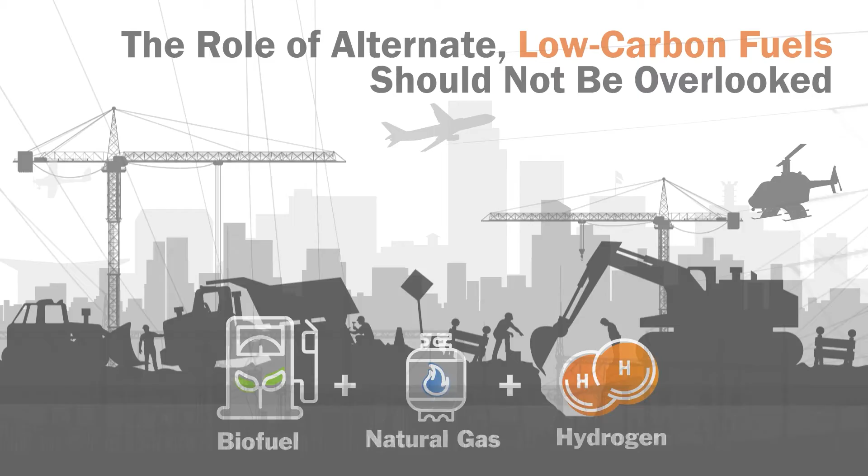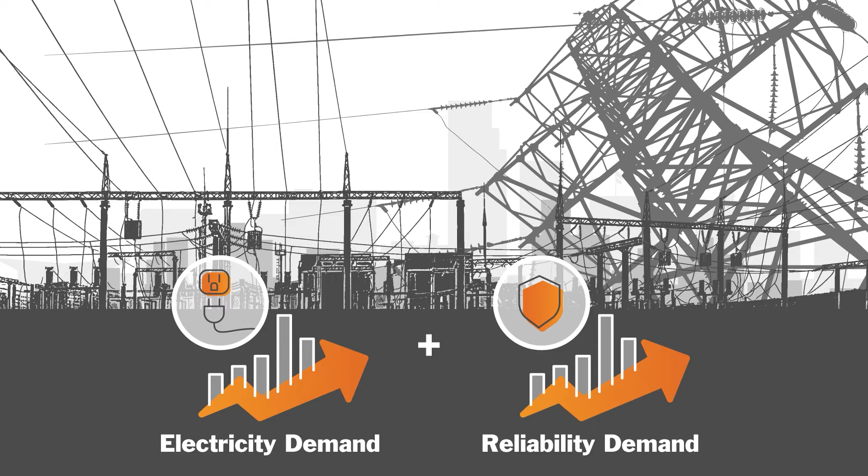We must consider the community-wide impact of decarbonization on the electric system as a whole. We know that electricity demand will literally drive when and how electricity is used. As demand increases, so does the imperative for reliability. As other sectors of our economy also work towards decarbonization, and as the population and economy continue to grow, OPPD is forecasting energy demand and growth that exceeds demand 150% by 2050.

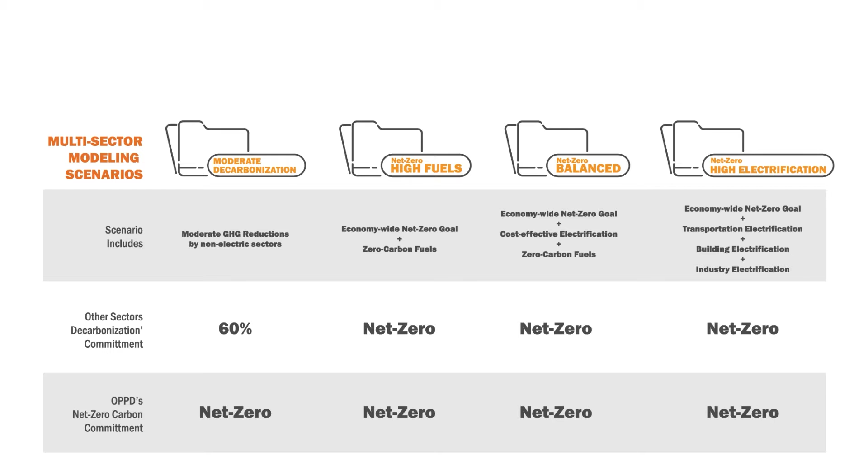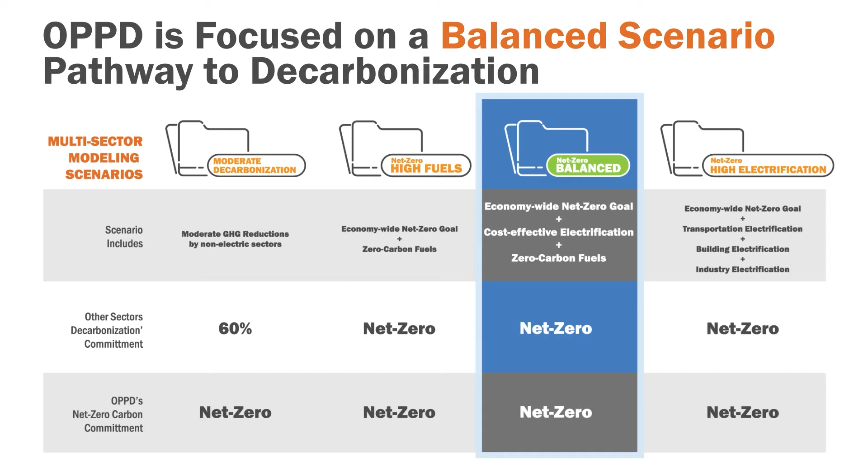To do our part to support all sectors, we're focused on a balanced scenario with multiple ways to get to decarbonization. The scenario that relies on a combination of electrification and decarbonized fuels is also the most cost-effective. The balanced scenario assumes that in the future, there will be a significant increase in electric vehicle adoption, that building heat will primarily be provided by electric heat pumps with natural gas backup, that industry will transition to a combination of electricity, hydrogen, and carbon capture and storage, and about 15% of the remaining total economy-wide emissions will be offset by negative emission technologies that actually remove carbon dioxide from the atmosphere.

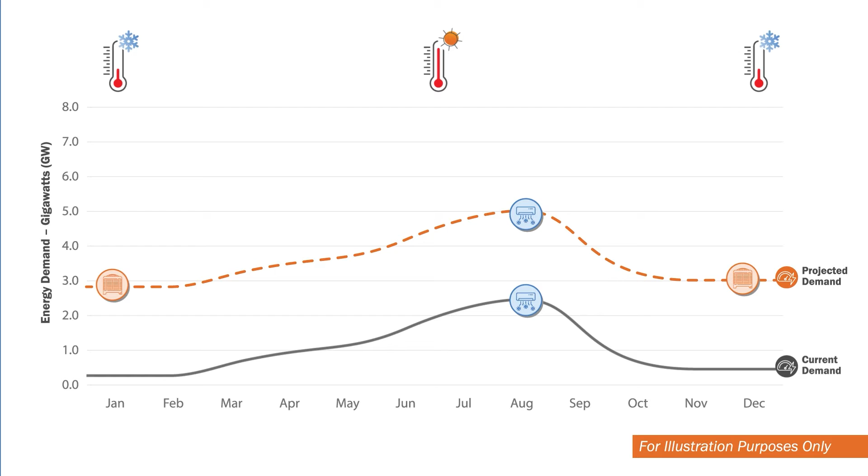When we put these assumptions into the balanced scenario model, we see a shift in the peak demand for electricity. Today, peak demand occurs on hot summer days when high temperatures mean more demand for air conditioning. In the future, cold winter days may also increase demand as building heat transitions to electric heat pumps. While we expect winter demand is still less than during summer, this shift results in peak electricity demand that more than doubles what it is today, from 2.5 gigawatts to 5 gigawatts.

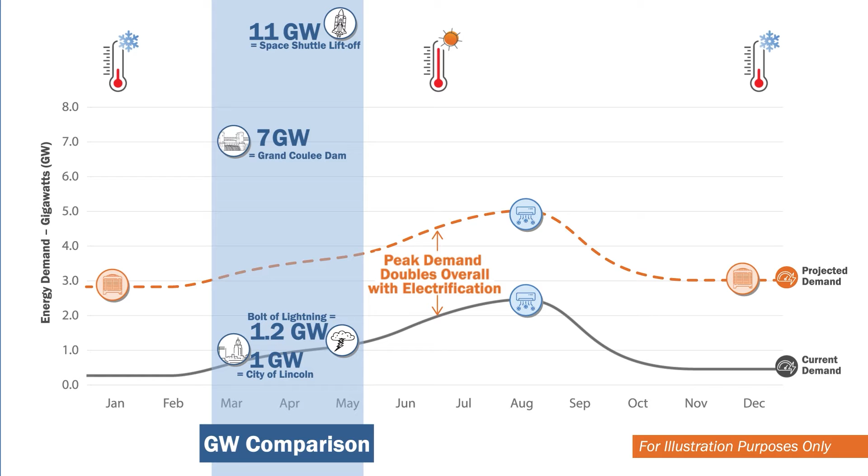Serving this sizable increase in electricity demand while working towards a decarbonized future makes OPPD's commitment to reliable, resilient, and affordable power more important than ever. At our third workshop, we reviewed the technologies we're considering, their performance, and associated costs, as well as fuel forecasting and modeling scenarios. As we consider and anticipate other sectors also making efforts to decarbonize, we assume and include energy

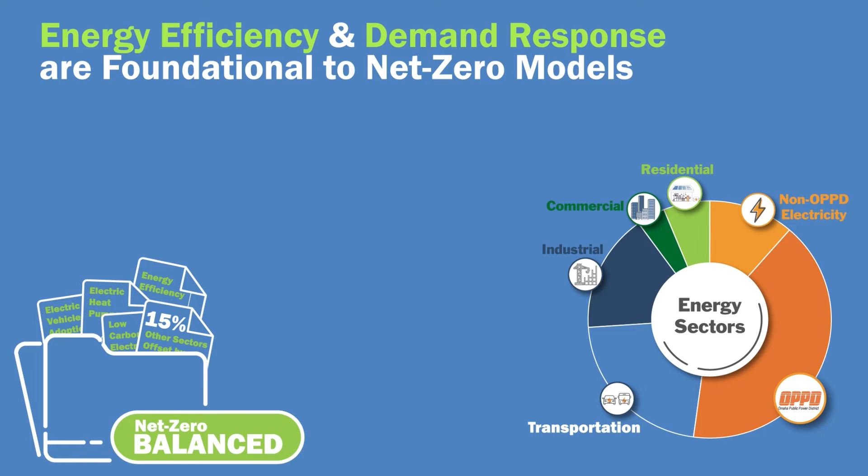efficiency into our modeling. And while widespread electrification will increase electric demand, there is an upside. Appliances and electric vehicles will require less energy to operate. So, even as electrification increases, energy use remains relatively unchanged or even slightly reduced due to increased efficiencies.

Consider your personal vehicle. As more people buy electric cars, that reduces the reliance on fossil fuels and reduces emissions. While electric vehicles add to the demand for electricity and require infrastructure updates, they are much more efficient in reducing emissions, like 3 to 4 times more than conventional gas-powered cars. So the net outcome is realized as energy that is never used or considered to be low carbon.

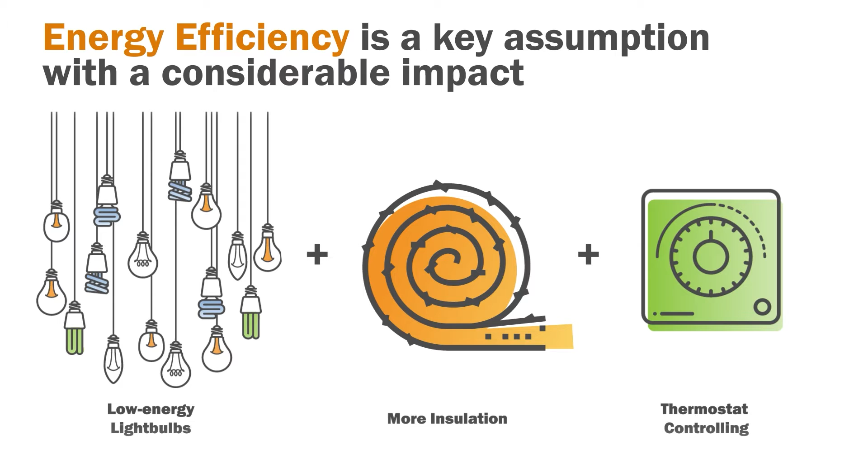Efficiencies can also be gained through programs that promote low-energy light bulbs, more insulation, or thermostat controls. This phenomenon multiplied for widespread use contributes to community-wide decarbonization, making energy efficiency a key assumption with considerable impact. To support the increased transition to more energy efficiency and the demand growth for electrification, OPPD identified, studied, and considered over 150 existing and future or emerging energy production technologies for its energy portfolio.

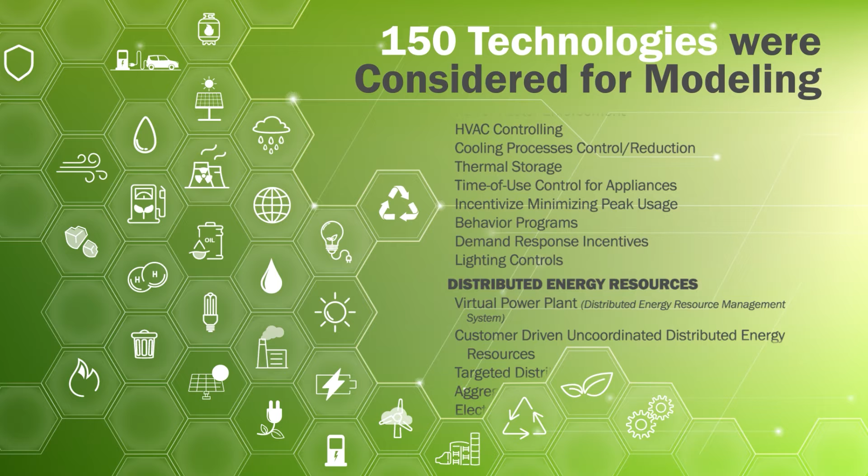This research included options for OPPD's existing power generation assets, as well as those that are planned or coming online through Power with Purpose initiatives. Considerations included leaving existing assets in place or converting existing assets to utilize other fuel sources, like coal to natural gas, oil to biofuels, or natural gas to hydrogen, and finally, the possibility of someday retiring some power generation assets.

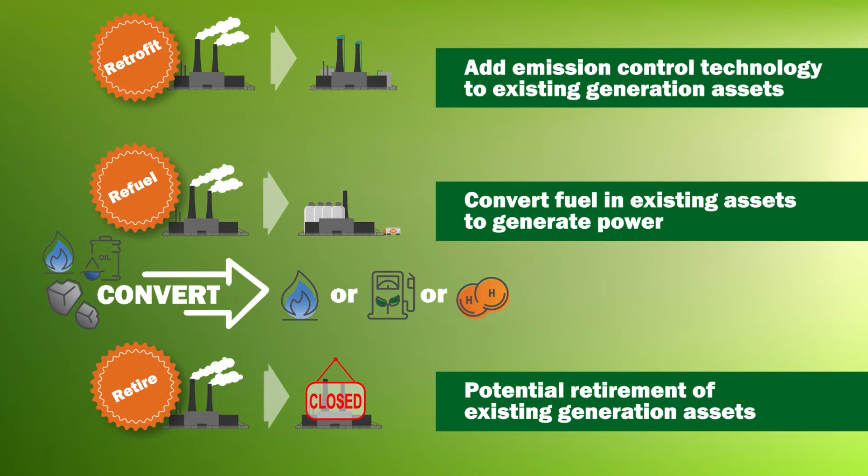Our existing and planned assets are integral elements of our energy portfolio as we transition to net zero carbon production by 2050. OPPD has determined carbon capture and sequestration will not be considered for coal-fueled power generation assets due to its significantly high cost, increased volumes of CO2 needed to sequester, and the lack of feasible physical geological formations necessary for sequestration in our service territory. We will, however, continue to consider carbon capture and sequestration for natural gas-fueled power generation assets since capture volumes are much lower for gas and the technologies are more manageable.

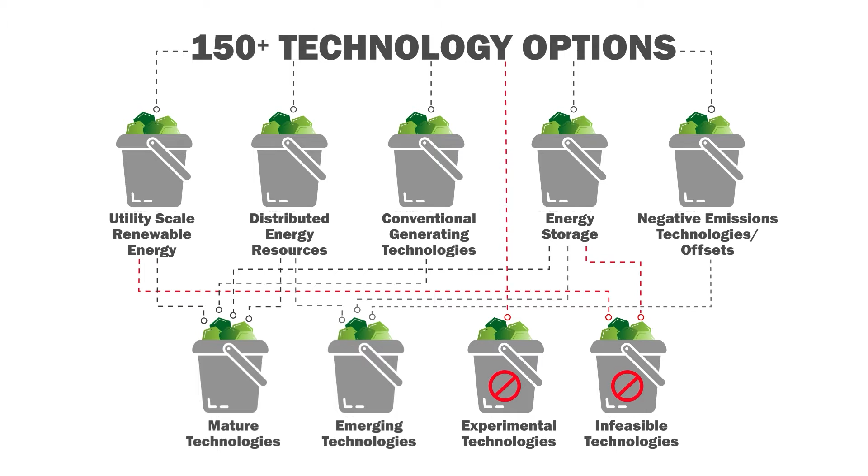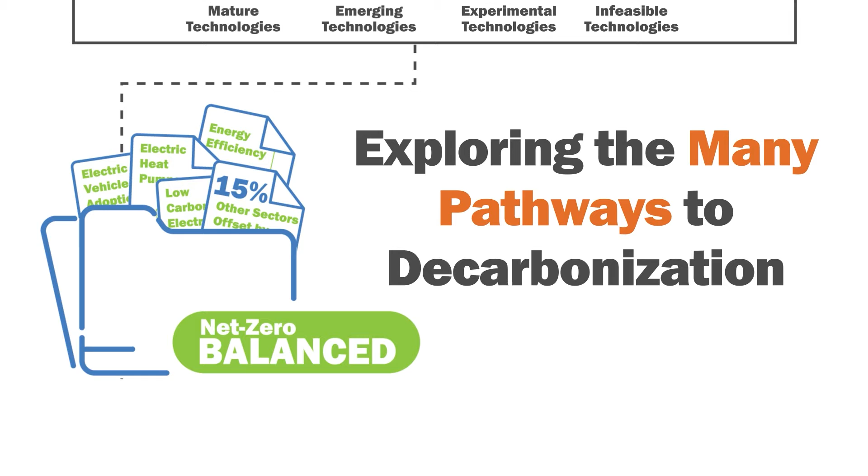Other potential energy production technologies we sorted and grouped. If a technology wasn't feasible, like carbon capture and sequestration of coal, it was withdrawn from consideration. Experimental technologies were also withdrawn. More suitable technologies were categorized based on cost, feasibility, and level of decarbonization. Technologies were then assigned a level of maturity or performance history ranging from mature to emerging or experimental. Each technology category, or combinations of technology categories, were explored further by modeling scenarios to support decarbonization. These assumptions and technology categories provided the basis to begin modeling.

In our fourth workshop, we focused on the technical aspects of scenario modeling and how it all fits together to map our pathways to decarbonization. The question we're working to solve is not if OPPD will pursue net zero carbon production, but rather how we can define an energy portfolio that is environmentally sensitive, reliable, and affordable for our customers. The future is uncertain, and we may not have all the answers today.

So our energy portfolio must be flexible and able to adapt to an ever-changing energy industry, customer preferences, and power generation technologies. Each scenario is analyzed for how quickly it will help OPPD reach the net zero goal, therein satisfying the need for environmental sensitivity. Next, each scenario is analyzed for reliability and resiliency. That measures OPPD's ability to keep the lights on and keep them on during expected and unexpected extreme conditions, like severe weather or energy grid disruptions. For this analysis, we must determine resource adequacy.

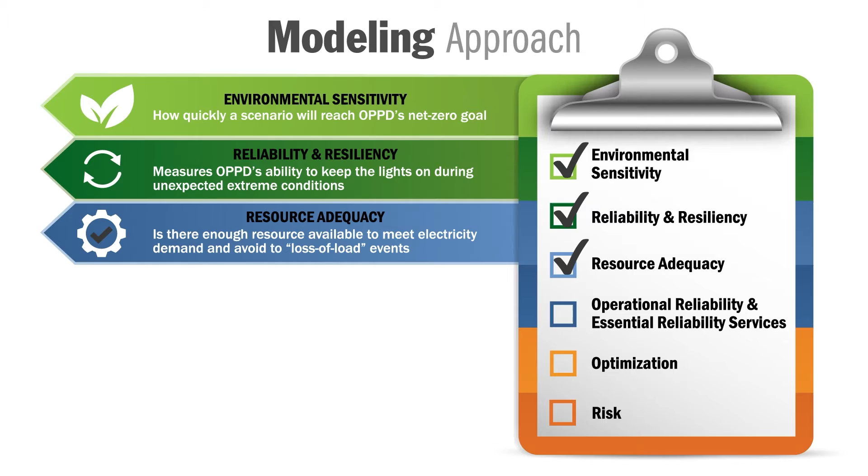That is, if there's enough of a resource available to meet electricity demand in a given scenario. Insufficient resources can cause unexpected brownouts or blackouts. We call this a loss of load event, and it occurs when the total electricity demand is higher than the available resources capacity. When the energy grid cannot support demand, it can result in brownout or blackout conditions across the system. By ensuring resource adequacy, loss of load events are less likely, if ever, to occur. The goal is to keep potential planned and unplanned outages to a minimum.

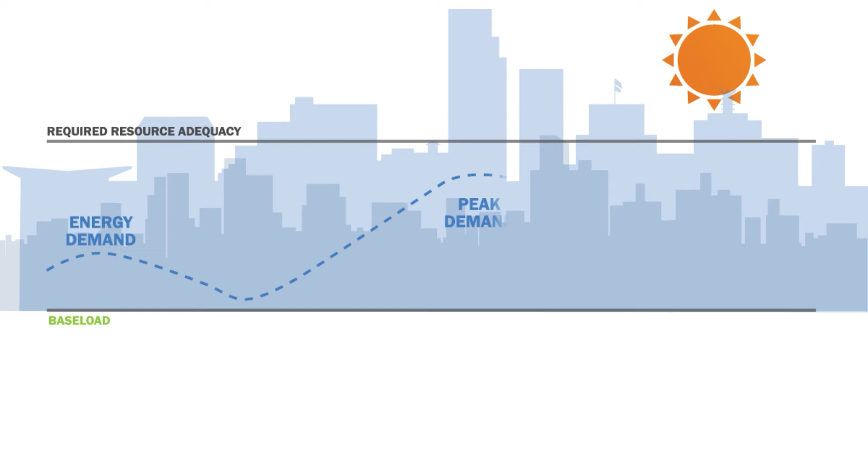To meet resource adequacy, we have to plan for peak demand and a bit more for buffer or a reserve margin. Traditional resources like coal, nuclear, and natural gas are better at accommodating resource adequacy because they can generate power at any time of day, during any season, for as long as needed. Planning for demand and reserve margins with these resources is straightforward. However, when we think about planning for demand and reserve margins for zero carbon resources like wind, solar, and energy storage, it gets more complicated.

Think about your energy use after kids come home from school and you get home from work. While the sun begins to set, you still need electricity to cook dinner, watch TV, power lights and computers for homework, or heat water at bath time. You'll likely also need to plug in your electric vehicle. It gets trickier to plan solar resources to fully meet peak demands. The same is true for wind and energy storage.

That's why we have to plan for a mix of power generation resources and supportive infrastructure to meet resource adequacy. Renewable resources have better potential to meet peak demands when combined together, like wind plus solar, or solar plus storage, rather than just wind, just solar, or storage alone.

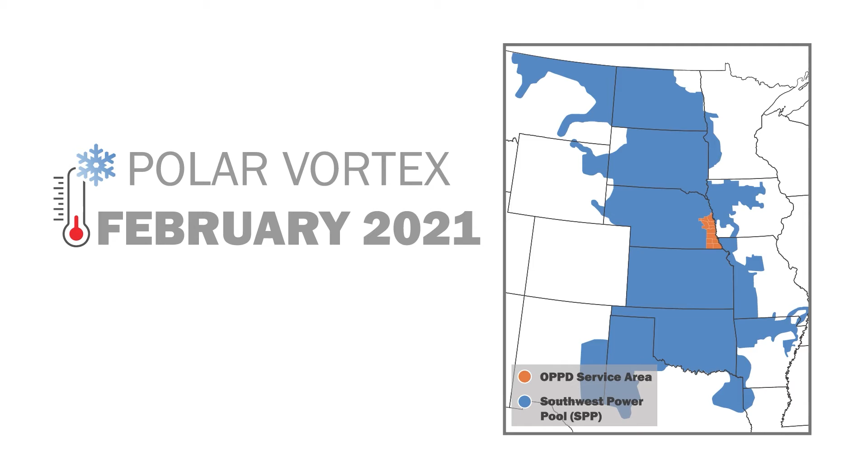To illustrate this, let's take a hypothetical look at the polar vortex outages that occurred across the Midwest from February 3rd through the 15th of 2021. If we look at the actual electricity demand for those bitterly cold days, paired with scaled actual solar and wind production available during the same time frame, which is significantly more than is currently installed on the electric system, we can easily analyze for resource adequacy during an unexpected, extreme weather event.

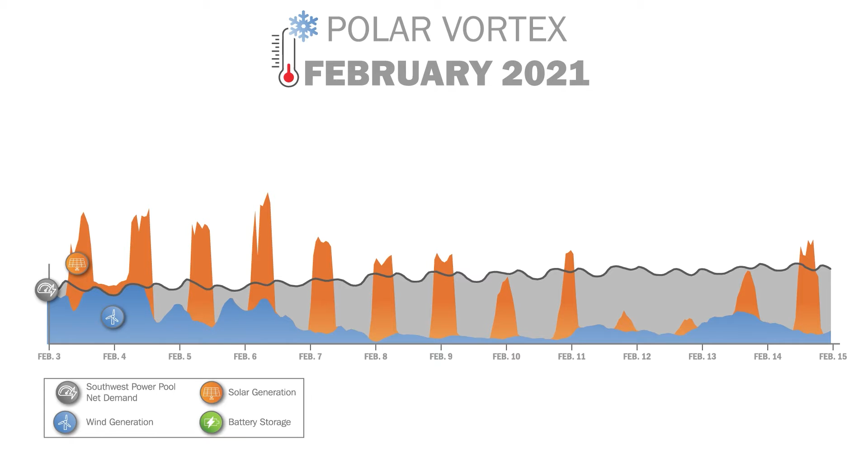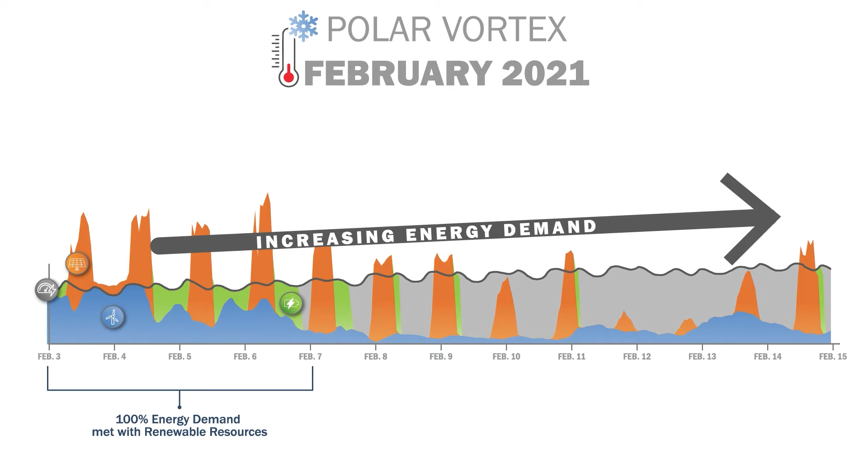For the first 4 days, nearly 100% of electricity demand could have been met through a combination of wind, solar, and energy storage resources. However, as the event continued, we see that energy demand steadily increased, despite pleas from the utilities for customers to curb energy use and alleviate excessive demand. It was so cold outside, electricity was needed to heat homes and buildings for people, pets, and livestock to stay warm, and to avoid freezing, bursting water pipes. In this real-world event, electricity demand increased while production from renewables decreased, creating a gap.

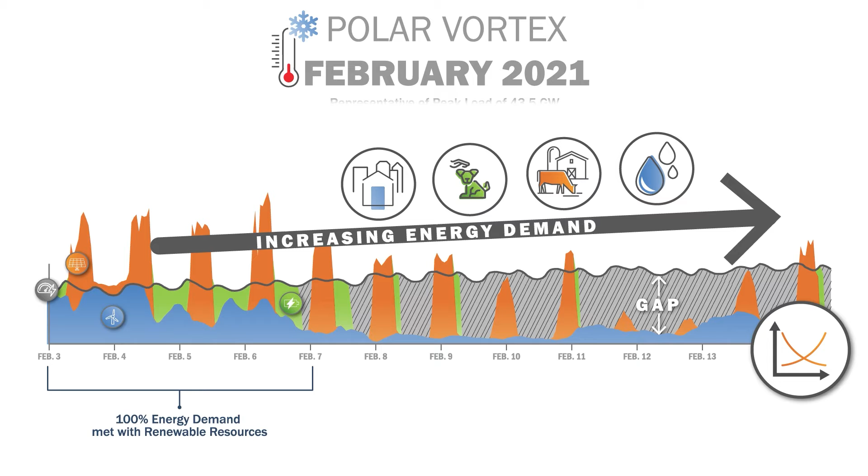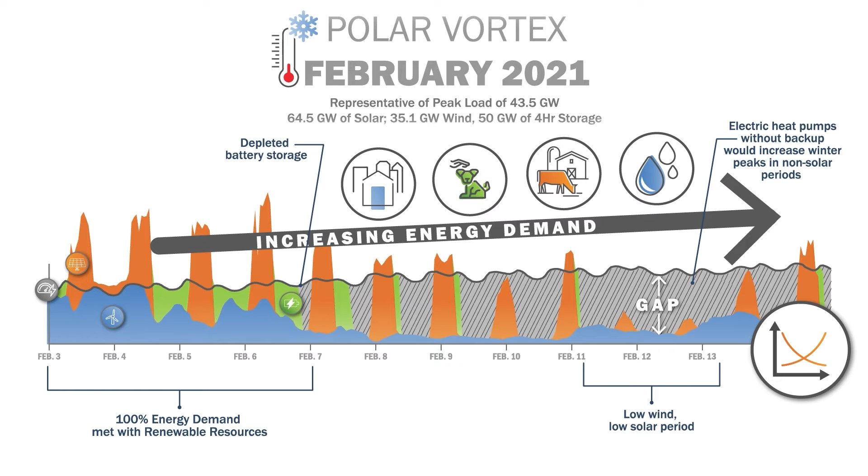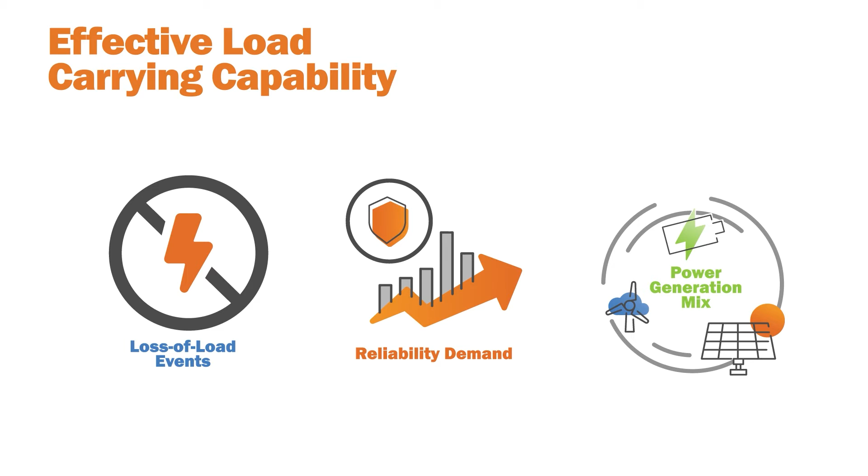The lesson here is that no generation resource, traditional or renewable, is perfect, especially when Mother Nature throws a curveball. It also illustrates the importance of resource adequacy analysis as we model OPPD's potential power generation scenarios for the future. We must find a mix of power generation sources that is reliable and resilient through an event like the February 2021 polar vortex. To do that, we look at effective load carrying capability of different resources. This measures loss of load probabilities and accounts for diminishing reliability contributions of resources, but it also captures the benefit of mixing generation resources.

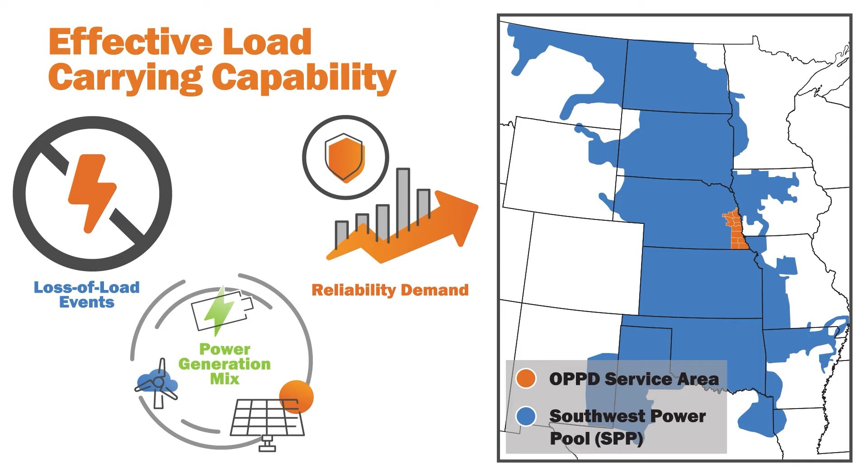OPPD's service territory is located within the Southwest Power Pool, or SPP. SPP determines the effective load carrying capability standards to measure renewable resources, which is key to our evaluation and demand responsiveness. Another aspect we consider is operational reliability and essential reliability services, meaning, are available resources capable of keeping the lights on? Are they able to ramp up or down to meet demand? Also, we need to consider the transmission system that distributes electricity while meeting both regional and national requirements.

We also look at resiliency to ensure our system is prepared and can withstand, as well as recover from, high-impact events like tornadoes, a polar vortex, possible fuel supply chain interruptions, or even a national security attack on our electrical grid. While there is not a specific standard or measure for resiliency, we can learn from past events and assess how a proposed set of power generation resources would perform. We then look for ways to improve resiliency during those high-impact events. That could include both infrastructure improvements and resource modifications.

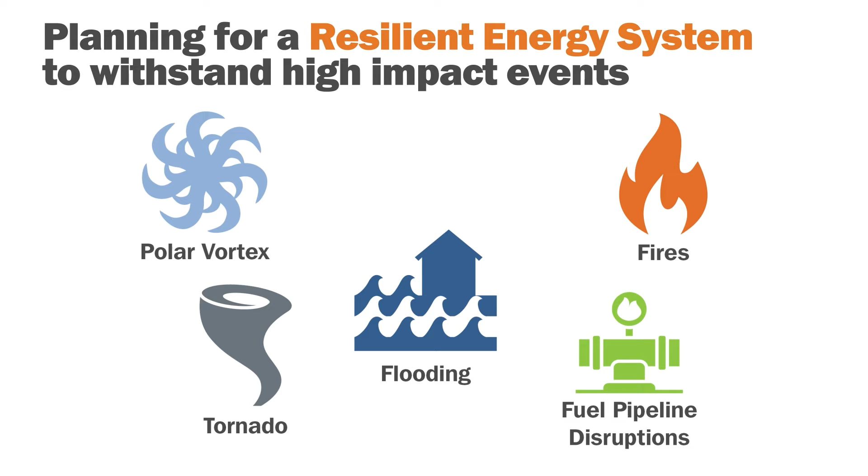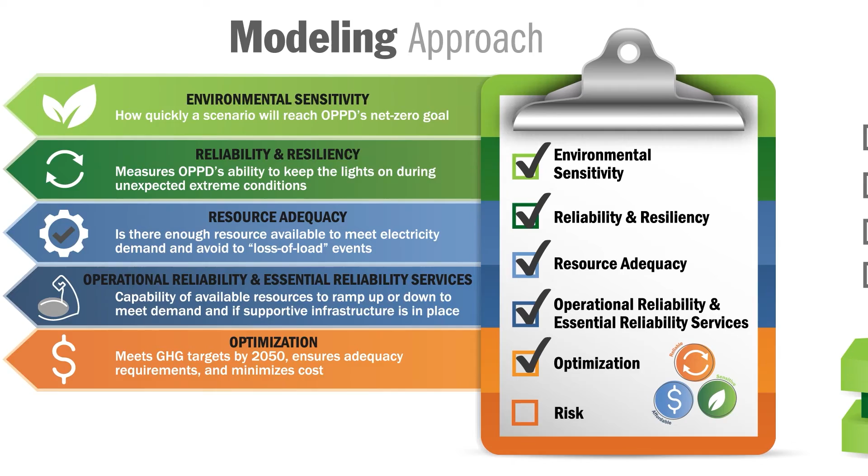Following analysis, we run an optimization model to select portfolios that meet environmental greenhouse gas reduction targets by 2050 or sooner and ensure resource adequacy requirements while minimizing cost. In short, OPPD selected portfolios will be environmentally sensitive, reliable, and affordable. The model will also identify optimal power generation resources, how much of those resources are needed, when resources should be built, and the total cost of the system needed to achieve our goal of net zero carbon production by 2050.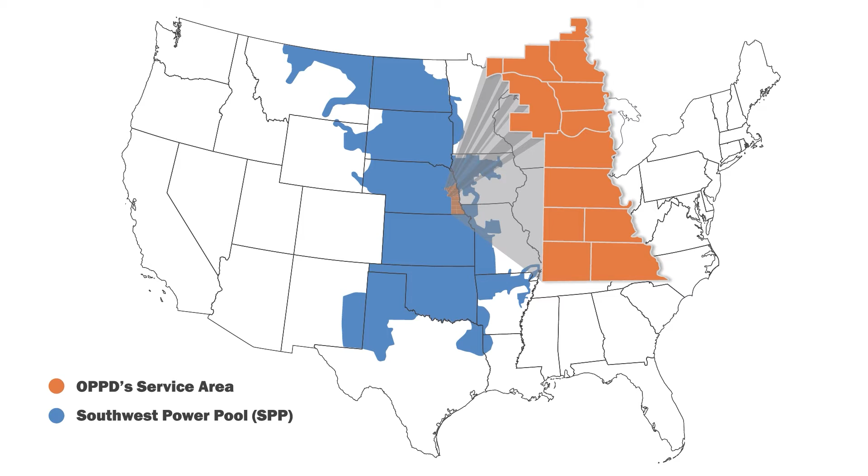Modeling activities also go beyond OPPD's footprint to determine how our plans will work with the Southwest Power Pool. We'll evaluate other SPP member portfolios and how they are changing to meet net zero carbon goals, which will affect and contribute to the buying, selling, and exchange of electricity resources throughout the region.

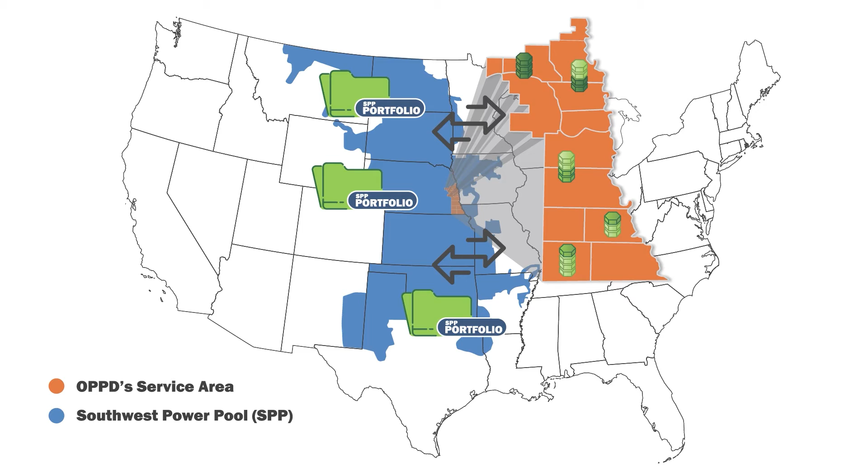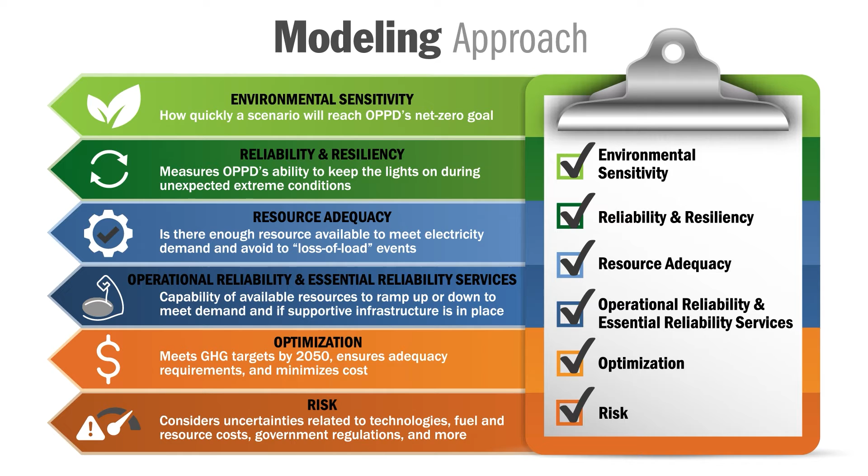Though SPP members can trade and support each other's electricity demands, it's important to maintain perspective and avoid risk that may arise from too much interdependence. While OPPD is a contributing member of the Southwest Power Pool, we must independently support the demands of our service area first and foremost. Further risk modeling will account for uncertainties, like the availability of identified technologies, variable fuel and resource costs, or the possibility of new government regulations regarding carbon emissions.

In October, we held our 5th workshop, focusing on the initial energy portfolio modeling results. We explained that achieving net zero carbon emissions will require a significant transformation in both how OPPD generates electricity and how our customers consume energy.

Listening to stakeholder feedback in prior workshops, our modeling and energy portfolio optimization scenarios considered both net zero carbon and absolute zero carbon options. Net zero carbon scenarios allow OPPD to buy, sell, and exchange electricity resources with other entities in the Southwest Power Pool to meet generation needs. Absolute zero carbon scenarios rely solely on electricity generated by OPPD assets.

We considered the pace of decarbonization. While our goal is net zero carbon production by 2050, we also included scenarios that would achieve this goal at a more accelerated pace by 2035.

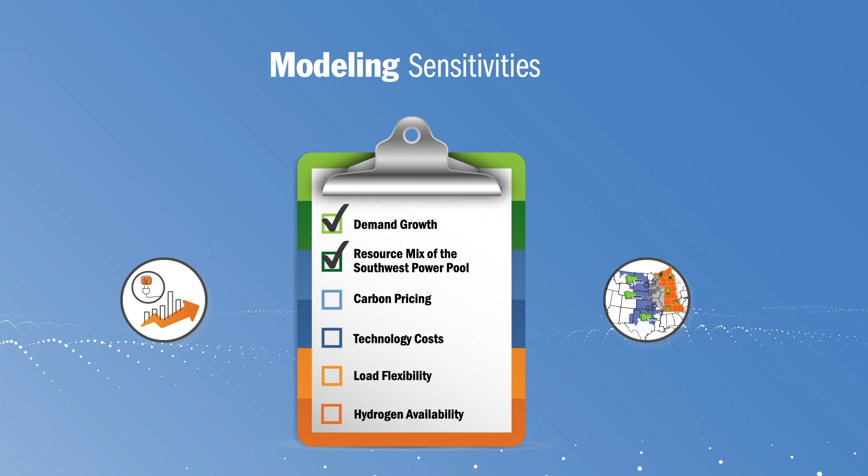And we were open to a wide range of available technologies, including mature technologies like wind, solar, and battery storage, as well as emerging technologies that may become scalable and more cost-effective in the future, such as long-duration storage and hydrogen. And finally, we accounted for sensitivities that may have affected the modeling results, like demand growth, resource mix of the Southwest Power Pool, carbon pricing, technology costs, load flexibility, and hydrogen availability.

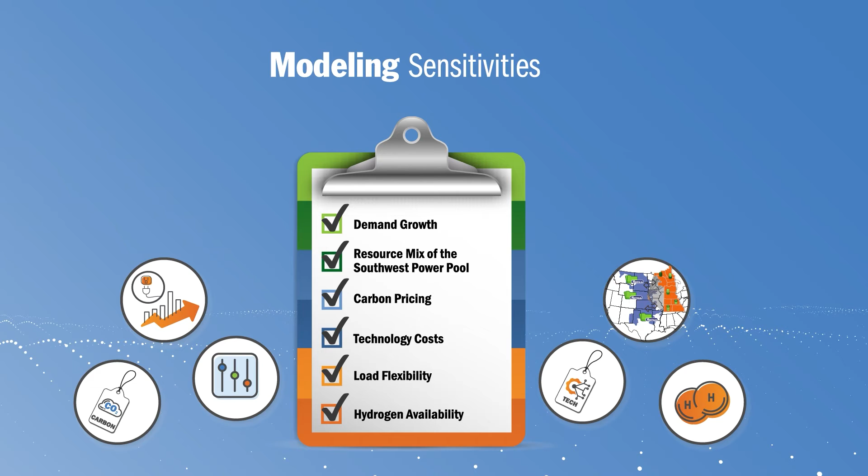All in all, our modeling relied on the best available, most widely used industry standard methods and data sources.

We cannot emphasize enough, every portfolio scenario we studied requires a significant amount of economy-wide energy efficiency to reach our net zero carbon goal. Our model assumes that our customers will improve energy efficiency by 2050. Some of this will be achieved through continued investments in energy-efficient appliances and building upgrades. Other efficiency improvements will be realized through beneficial electrification, such as community-wide conversion to electric vehicles and electric heat pumps.

But with this beneficial electrification comes substantial load growth over the next 30 years. To accommodate this growth, while meeting our net zero carbon goal, OPPD will need to increase the capacity of solar and wind assets from around 1 gigawatt to over 12 gigawatts by 2050.

These new carbon-free renewable assets supply the vast majority of energy. However, some firm generation resources, like natural gas, will still be necessary for resource adequacy and to meet system reliability needs. Across all net zero carbon scenarios, OPPD will eventually convert our remaining coal-powered plants to natural gas. The timing of this varies by scenario, taking place sometime between 2030 and 2045.

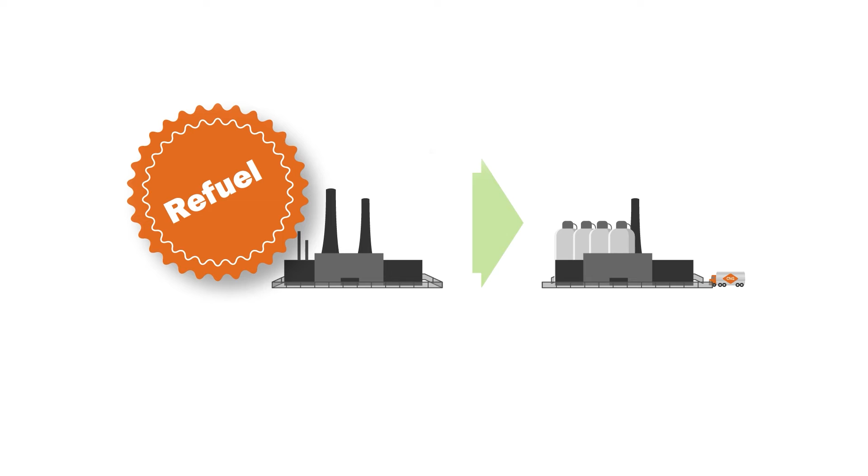Our modeling results also assume that other existing natural gas assets would have the ability to utilize low or zero carbon fuels, such as green hydrogen or biofuel. In total, OPPD would need an additional 1 gigawatt of firm power generation capacity by 2050 to support the continued integration of renewable energy assets.

These assets play an important role to ensuring heating systems and lights reliably stay on, even in the harshest of weather conditions, and is also the industry standard or best practice for resource adequacy, reliability, and resiliency.

To illustrate how renewable energy and firm resources, such as natural gas, work together to deliver low-carbon, reliable electricity, we tested it against actual historical weather conditions from 2017.

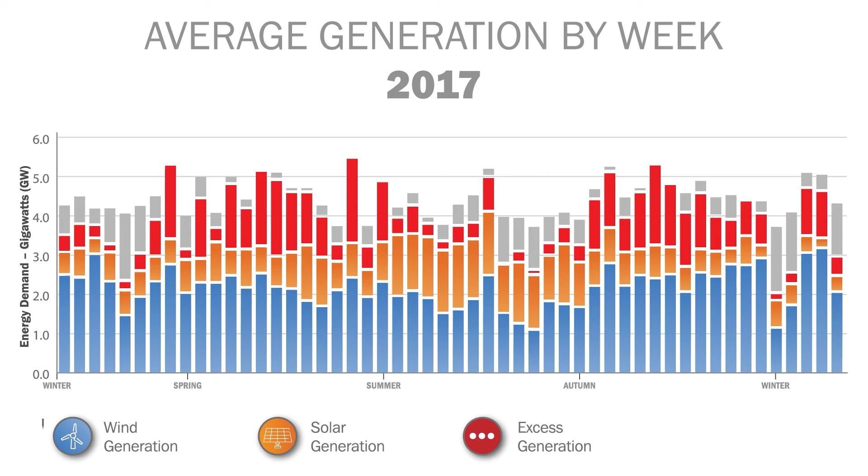The series of bars shown here represent 52 weeks of the year. Each individual bar shows the amount of generated capacity in gigawatts for each available resource. Blue represents wind, orange represents solar, red is oversupply or excess generation, and gray represents the need for firm backup capacity.

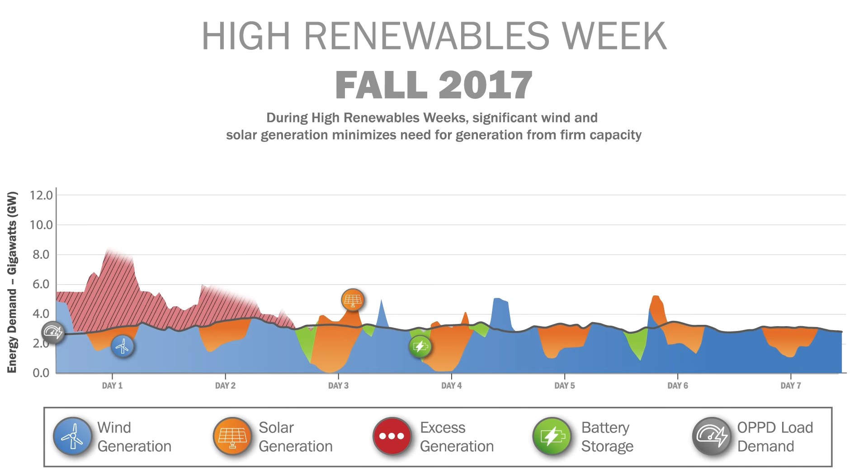When looking at a specific week in the fall, where the black line represents OPPD's load, the selected net zero carbon scenario provides sufficient capacity, and even more. The excess can be saved in battery storage for later use, shown in green, and the remainder, shown in red, can be exported and sold to our energy partners in the Southwest Power Pool or others connected to the nationwide electricity grid.

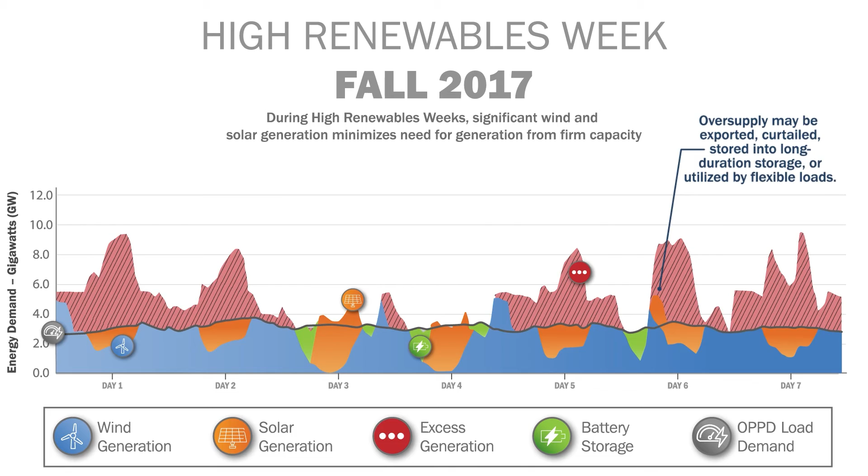Looking at another week in the winter, modeling shows that even with large quantities of renewable capacity, renewable resources alone would be unable to meet the demand load. However, firm dispatchable capacity is able to adequately accommodate the load.

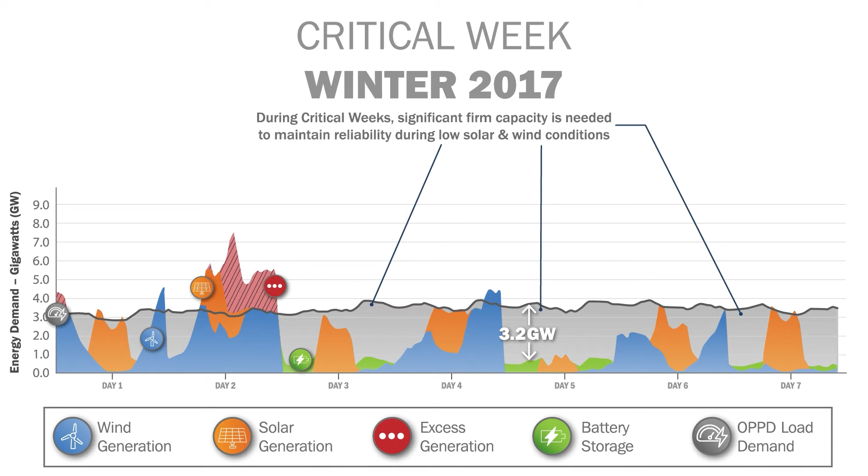This real-life example illustrates how renewable energy resources, like solar and wind, combined with battery storage and minimal use of backup generation, can work together to deliver reliable and resilient net zero carbon electricity.

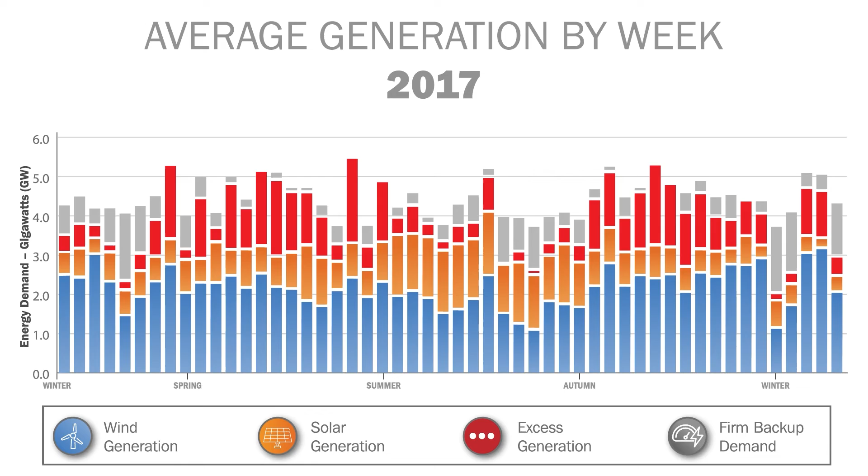Shifting now to the pace of decarbonization, where we explored multiple timelines for implementation. Our modeling included 2050, aligned with our net zero carbon reduction goal, as well as an accelerated pathway of 2035 to achieve deep emission reduction sooner. We found that regardless of the pace of decarbonization, the optimal portfolio of generation assets was the same.

Accelerating decarbonization would require quicker adoption, acquisition, and implementation of wind, solar, and battery storage assets. Doing so would result in less total greenhouse gas emissions, but would come at a slightly higher cost and require large quantities of near-term renewable resource additions.

Implementation over a longer time frame provides the opportunity to take advantage of potential emerging technologies, but produces more cumulative emissions. The pace of beneficial electrification also impacts projected load sensitivities. If electrification occurs more rapidly, then implementation of renewable and firm capacity assets must occur simultaneously to support the additional energy demand.

Switching gears now, we considered the pros and cons of absolute zero carbon scenarios, where OPPD can only build non-emitting resources and cannot take advantage of negative emissions technologies or credits.

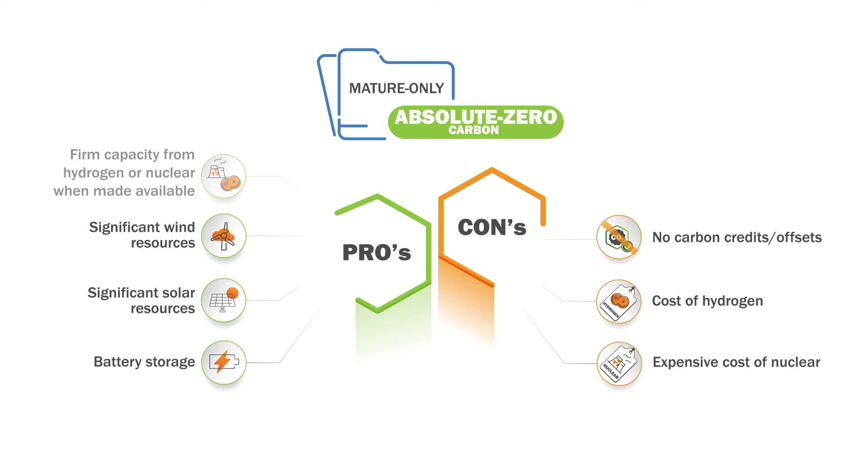The estimated cost of hydrogen fuel is expensive, multiple times more than natural gas. Nuclear is even more expensive. The alternative is to forego the firm capacity assets and rely only on renewable and energy storage assets, thereby needing significantly more assets to accommodate demand in all conditions, which in turn also significantly increases implementation costs.

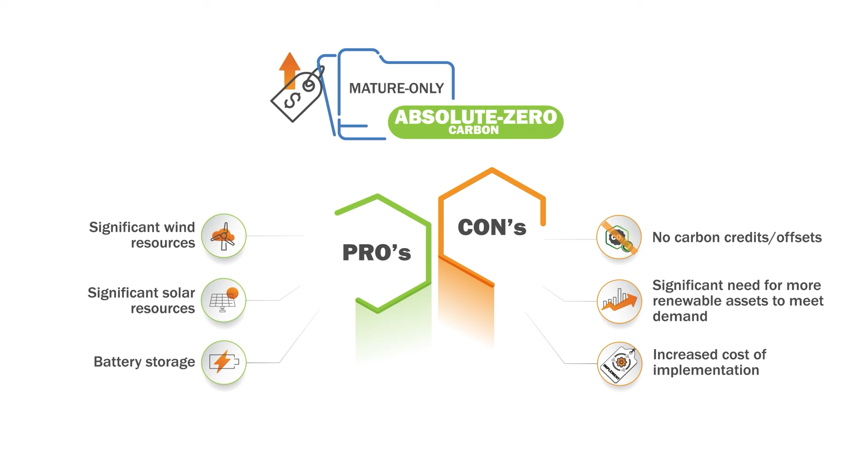In either case, the absolute zero carbon scenarios increase costs significantly over net zero scenarios, doubling overall costs. Absolute zero carbon scenarios also require unproven, emerging technologies to be viable. And finally, by 2050, there's no additional realized greenhouse gas benefit resulting from absolute zero carbon scenarios instead of net zero scenarios.

Since we will be adding solar and wind assets to any selected portfolio, we also consider direct and indirect land use impacts. Direct land use includes the space needed for wind turbine foundation pads or solar arrays. Indirect land use refers to the total development footprint, including the area between wind turbines and each row of solar panels.

While the indirect land use for wind turbines is significantly more than solar panels, that land can still be used as productive farm or ranch lands. Our modeling projects around 1.1% of land within Nebraska would need to be dedicated for wind and solar assets to achieve our net zero carbon goal.

All of these sensitivities were included in our optimization and modeling scenarios. Our final workshop in December focused on risk and resilience analyses of the final modeling results, identifying the optimal energy portfolio options to meet OPPD's net zero carbon production goals by the year 2050.

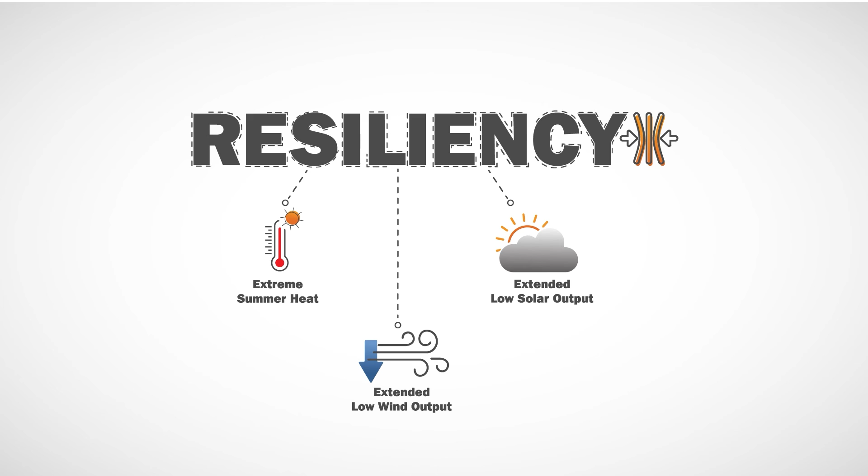During extreme winter cold or polar vortexes, again, in high renewable producing weeks, demand challenges are easily met, but in lower renewable weeks, with little wind and solar, resiliency must be provided by firm dispatchable capacity to meet peak demands. However, when we factored in startup failures or fuel supply disruptions, the modeling triggered potential resiliency and reliability challenges for a few hours, occurring during overnight hours. To mitigate these challenges, added measures would be required, which might include having additional fuel available on site, winterizing the fuel delivery infrastructure,

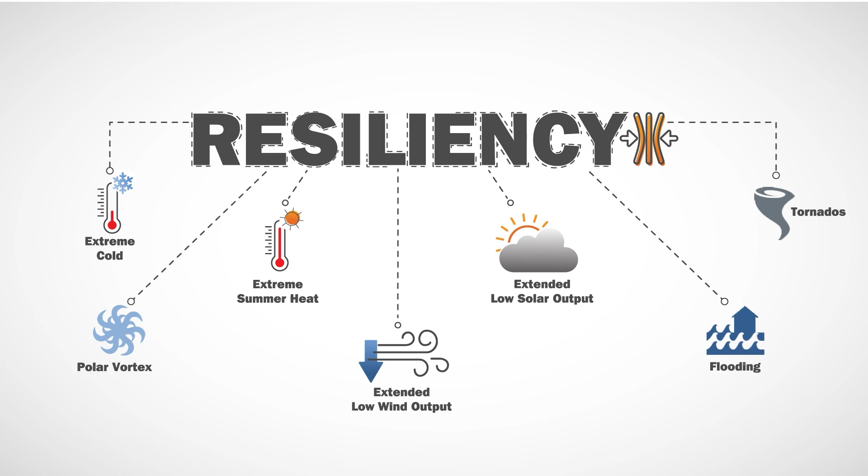And investing in wind turbine de-icing technology. And finally, during extreme local weather events like flooding or tornadoes, meeting resiliency challenges are dependent on OPPD's partnerships with other regional utilities, primarily within the Southwest Power Pool, to help provide adequate generation and secure reliable generation resources to meet peak demand.

Over the past year and a half, our Pathways to Decarbonization team worked collaboratively to identify optimal energy portfolio scenarios to reach our net zero carbon production goal by 2050. Our final analysis arrived at these key findings.

1. OPPD can achieve net zero carbon production while balancing affordability and reliability. Transformational changes to energy generation is achievable with relatively moderate cost impacts. Decarbonization portfolios have a modeled cost increase of approximately 10 to 20% over time by the year 2050, while maintaining resource adequacy levels.

2. Ceasing coal generation and reduced fossil generation is projected in all net zero scenarios, both of which will be replaced with low-carbon resources. All scenarios ultimately repower or retire OPPD's coal generation facilities by 2050.

3. A mix of new, low-carbon resources, including renewable energy, energy storage, and community-wide energy electrification will be required. Large quantities of low-carbon resources are required to eliminate fossil fuel generation and reduce emissions across OPPD's system.

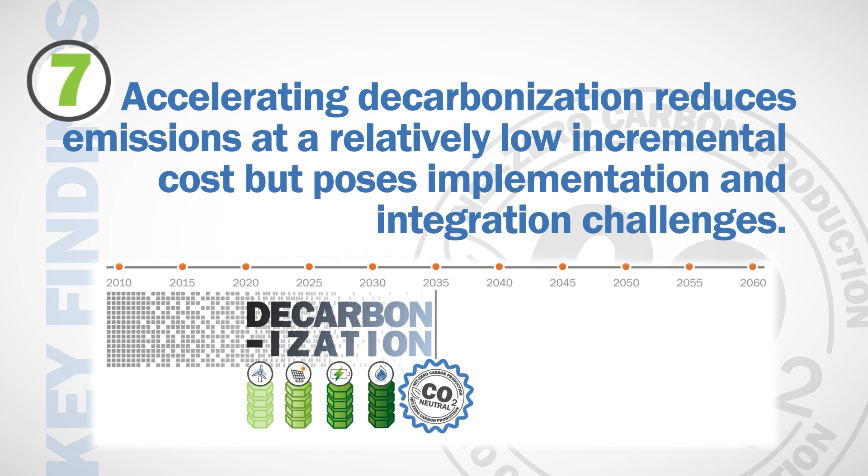and operational risks. 8. The changing resource mix will pose new resiliency challenges that must be evaluated, understood, and mitigated. Critical resource adequacy periods are expected to change from peak summer conditions to periods of extreme cold or extended periods of low renewable generation. Grid resiliency will depend on how utilities anticipate and prepare for these extreme events as the grid continues to evolve.

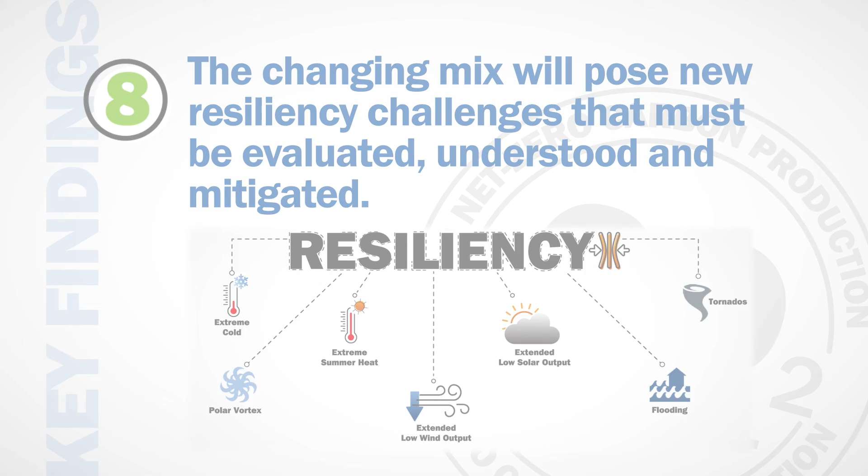The steps we've taken with our Pathways to Decarbonization-Energy Portfolio study surpasses all prior work OPPD has done to understand the changes needed to meet our goal of net zero carbon production by 2050.

We've identified actionable pathways to drastically reduce greenhouse gas emissions from our portfolio, while still maintaining energy reliability, resiliency, and affordability. Throughout this journey, we've shared our findings with OPPD leadership, its board of directors, and you, the public.

Our findings from the Pathways to Decarbonization-Energy Portfolio study will shape OPPD's Integrated Resource Plan, or IRP, which gets filed with the Western Area Power Administration every 5 years and is due in February 2022.

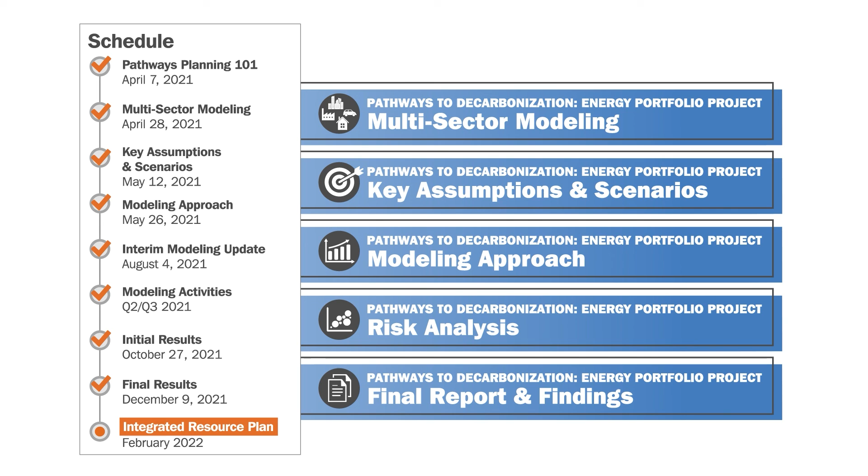As always, we appreciate your time and interest throughout this investigative process. Your participation and engagement resulted in a stronger Pathways to Decarbonization-Energy Portfolio study that reflects our community's needs and concerns. We're continually looking for long-term solutions that allow us to be your energy partner and help our region thrive. We are committed to providing reliable, sustainable, and affordable results to build a brighter future.